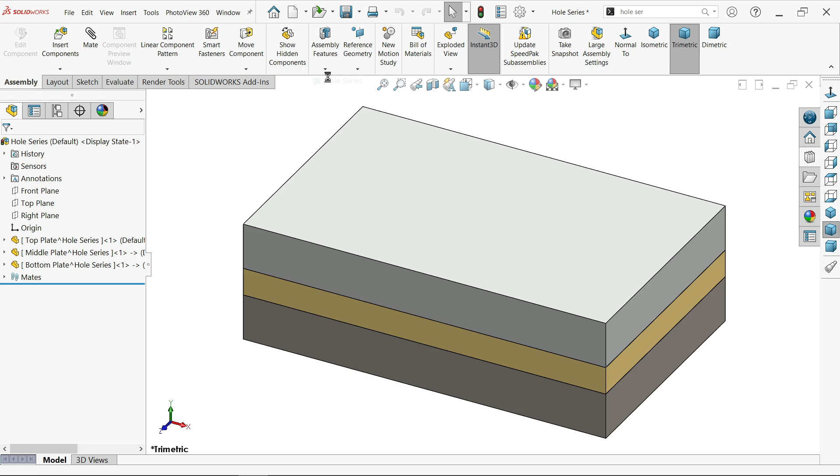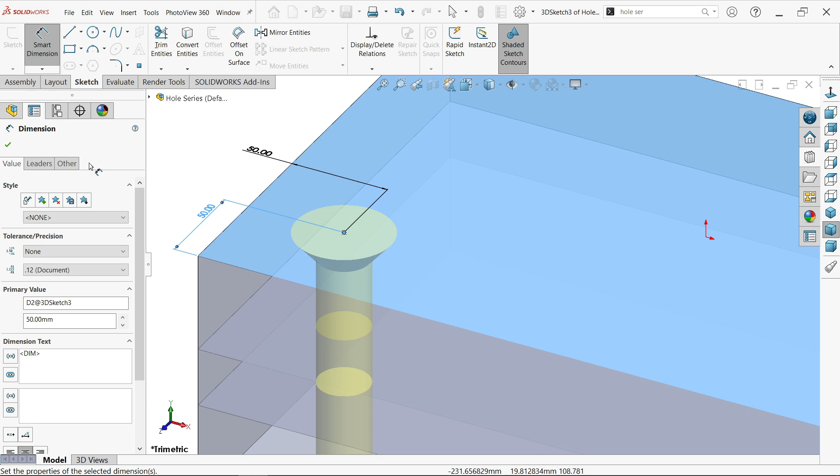Let's activate this hole series. Now the first option here is locate the position, and here choose create new. We will use for existing hole also. So let's move cursor and place somewhere, right click, select and exit. Smart dimension, and let's define the dimension: 50. Let's say okay.

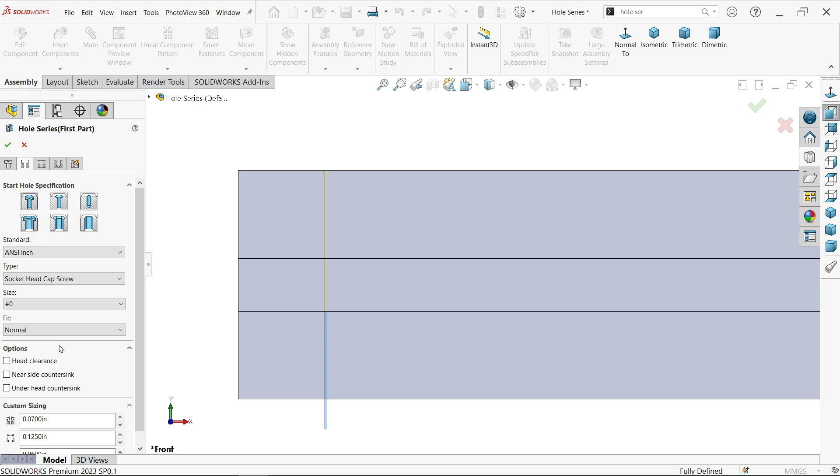Now just go to the second one, front view. Now here I have to define the hole position or dimensions specification for the upper or top plate. So hole is, I'm going to use counter bore hole, standard inch, and here I'm going to use socket head cap screw. Size, let's say 1 inch. You will see the preview. Fit, I'm going to keep normal, and here I'm going to add head clearance. See, if you add, it will add 2 millimeter at bottom.

Go to the third one. Now this is going to define this hole specification for the middle plate. You will see. So if you want to change anything, just uncheck and do whatever you want. You want to change the size or clearance, everything you can do it, but we will keep standard, which is derived from this one. Now the fourth one is, now define the hole for bottom plate.

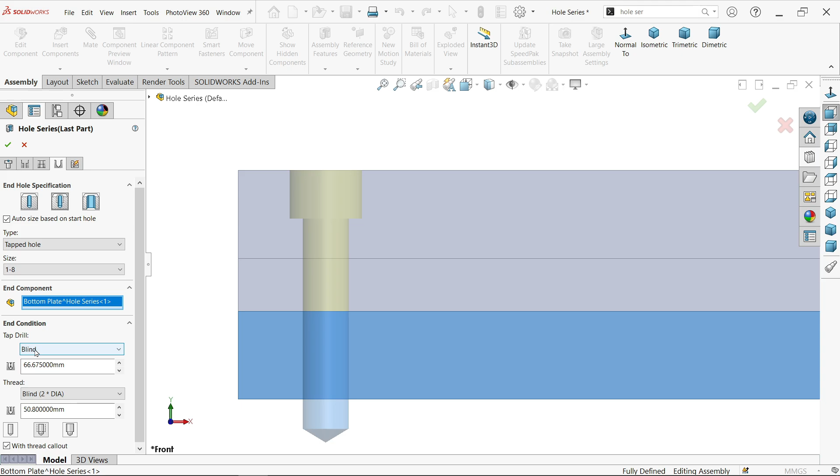Now first, type tapped hole. Now you have to define the end component. So this is our end plate. Now tapped, how much tapped, throughout hole I want to make. Blind we will keep as it is.

Now there is one more option called fastener. Look, if you want to add fastener, this option will not be available if you don't have the design library toolbox add-ins. If not available, just simply click add-ins and this will be available. So let's say add place fastener.

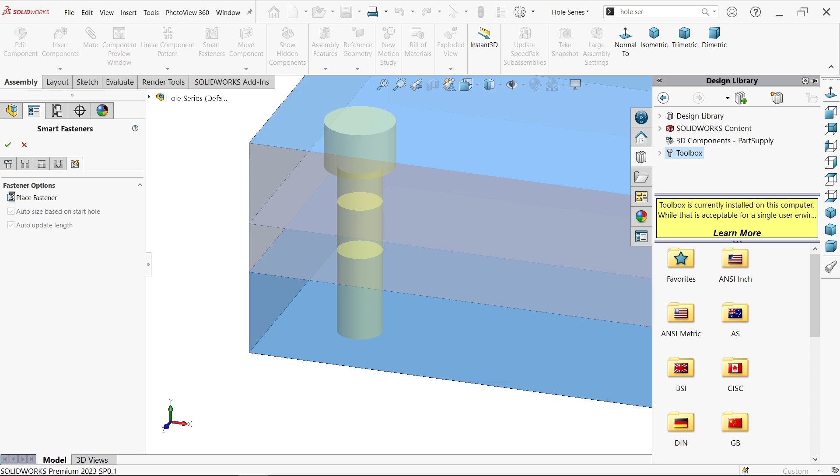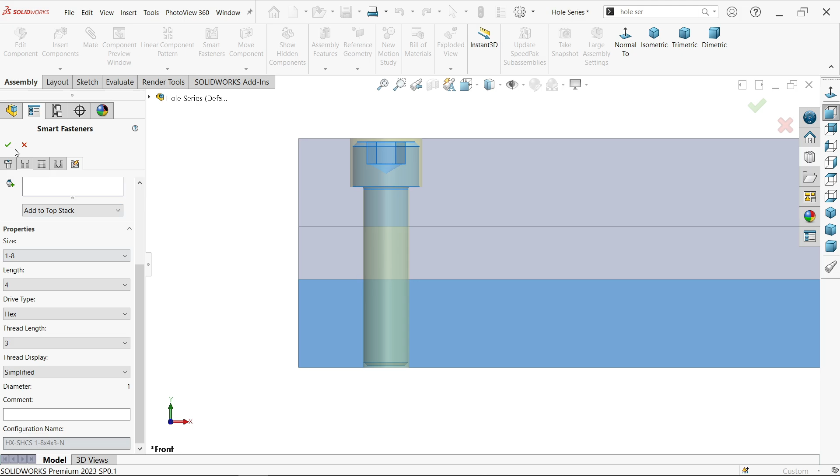Now according to these dimensions, system took this one. Let's say normal view. Let's say socket head cap screw. Size, everything, let's say length, I'm going to reduce, let's say 4. Okay, the length is going to reduce. Simplified thread, that's it. Let's say okay, and let's define.

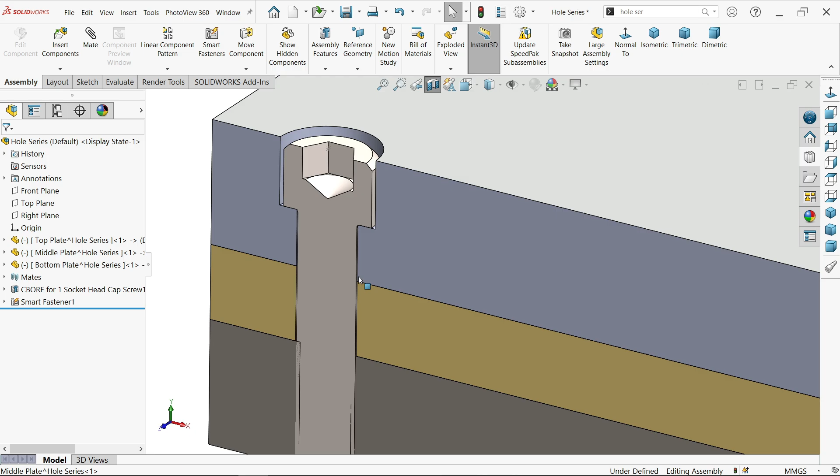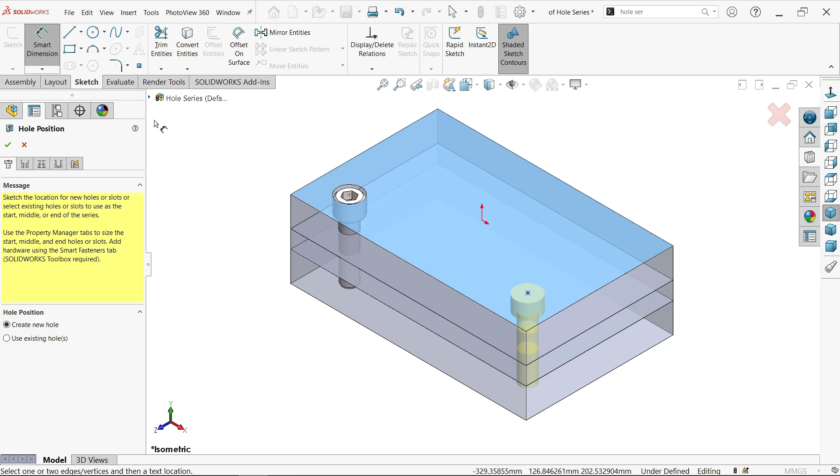Let's define one more hole series. Let's create one more. Let's say place here, right click, exit. This is also I am going to define: 50.

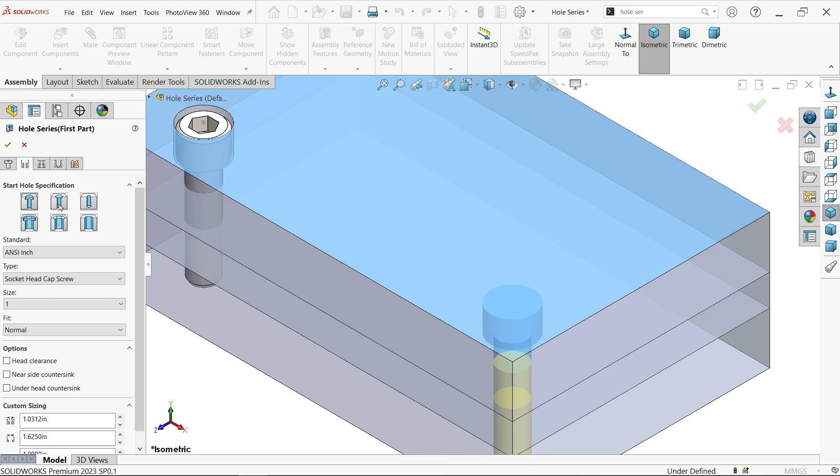Go to next. Now here inch, socket head cap screw. Okay, I'm going to define here counter bore, counter sink hole. Flat head screw 100, or let's say socket counter sink head 1 inch. Keep normal. Let's check front view. So okay, this looks better. Head clearance, let's say 1 mm, so that there is a clearance going to be added here.

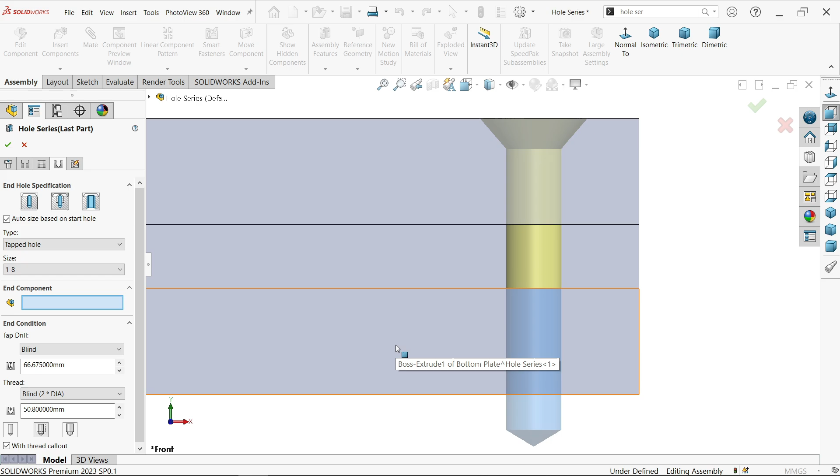Now for the middle one, I am going to keep standard hole. The hole for the bottom one, let's select this one. Through all, the whole depth and condition thread we will keep as it is. Now choose here fastener, place fastener.

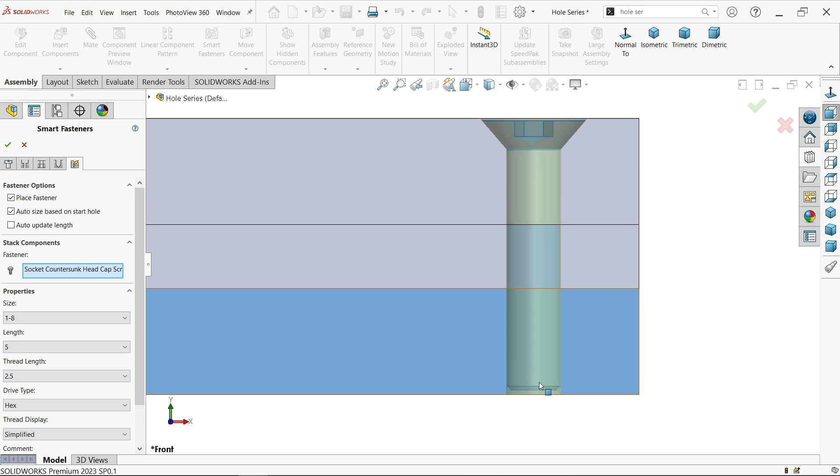Look, this is going to be bigger. So let's say 5 millimeter. Okay. Let's do this one. And everything we will keep as it is. Say OK. See, now let's look at the plate, top plate, there is one more hole,

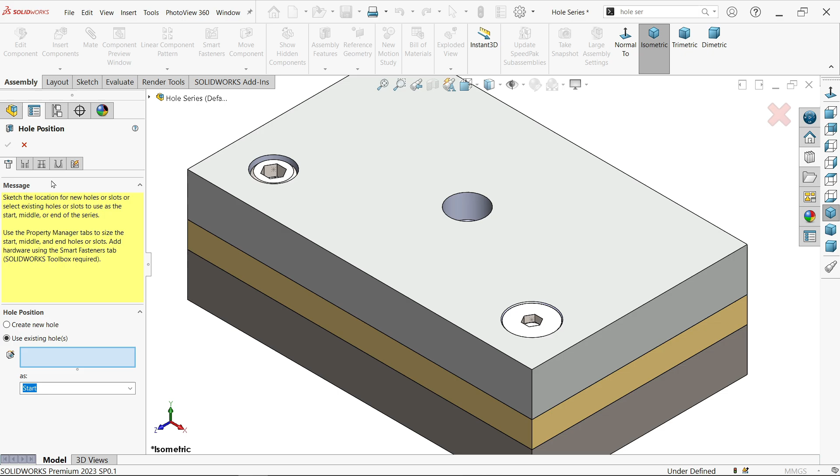unsuppress. Now let's again activate hole series. Now here I am going to use existing hole. Similarly, use this face. Let's go to hole. There will be nothing to do here because we already made the hole here for one part.

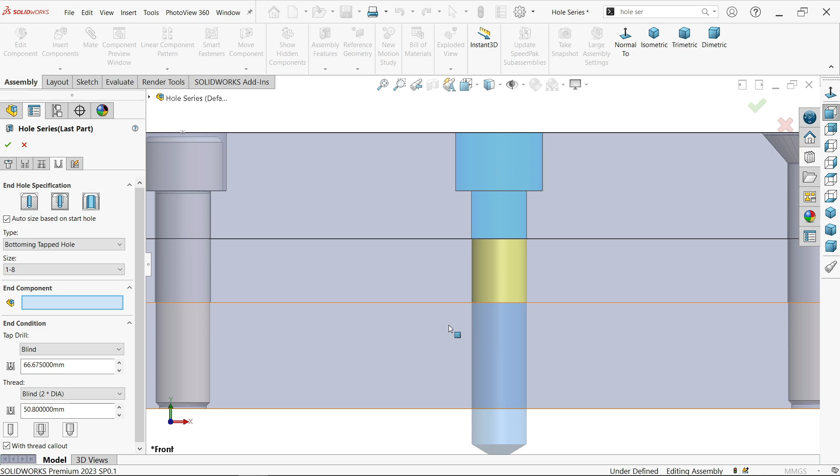Okay, second one, for hole for middle plate, let's say normal. We will keep as it is. This data is derived from the upper hole. Second one, the third one, let's first, you have to define end component. Hole similarly make through all.

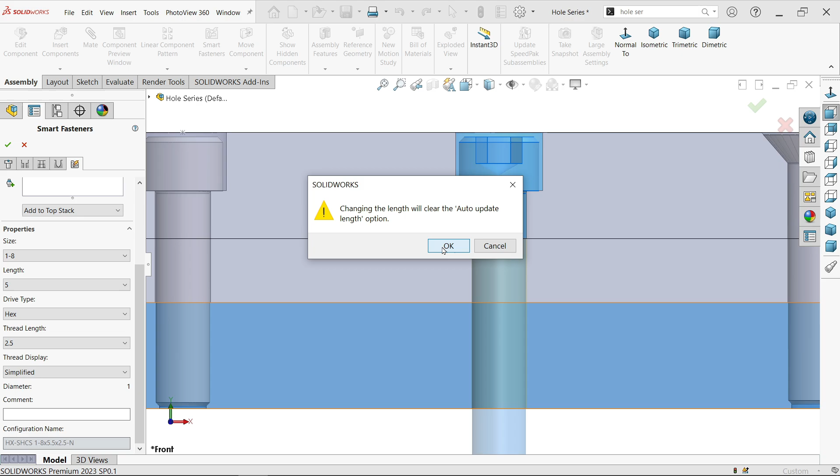Go to fastener, place fastener. Similarly, you can make length shorter. Okay, let's make it 4. Say OK. And that's it. So this is how we created it.

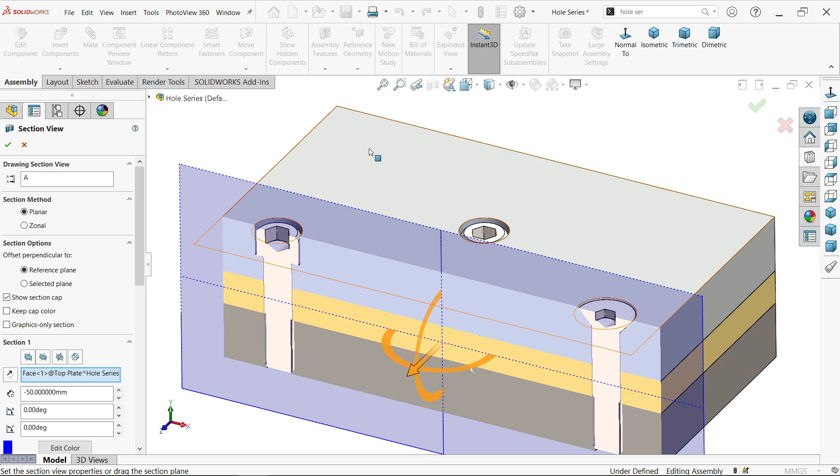Okay, let's see. So this is a very important feature in SolidWorks assembly. I hope you like it.